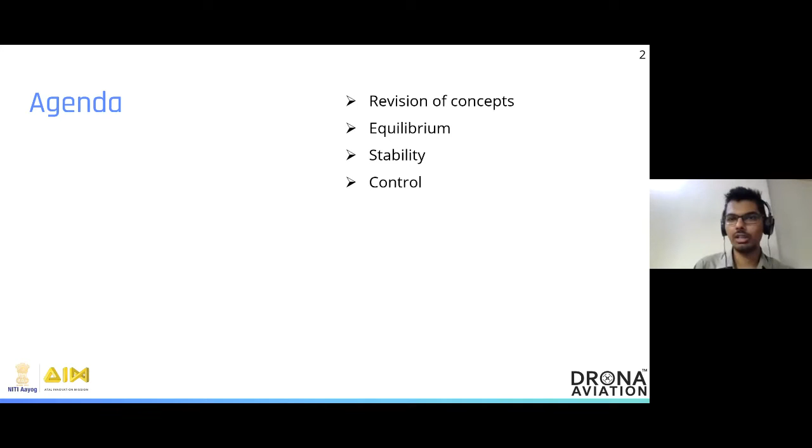So I guess we can simply start with the webinar, and we'll understand what this is. So firstly, let us know what is the agenda for today. First thing is revision of concepts. Then we are going to study equilibrium, stability, and then control. Very simple. Now let us first revise a few of the concepts that we learned previously.

You might be remembering this: forces of flight. So in any flying system, there are many forces that act on it, but we learned about four basic forces, four most important forces, and these are thrust, lift, drag, and gravity. So if you remember, lift is the force that allows a system to go up in the air. Gravity is the weight of the system that will act downwards and bring the system downwards.

Thrust is the force that propels the system in the forward direction, in whatever direction you want to go, and drag is like the resistance. So when a system is moving forward, the air will put resistance to it, and that force is called drag. So we have these four basic forces on any flying system.

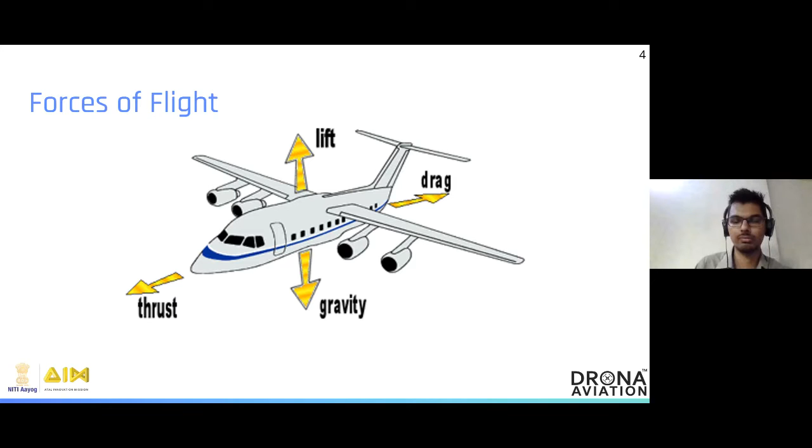Then we learned about the principal axes. In any flying system, we have these three axes. The first one is the longitudinal or the roll axis that runs from the back of the drone to the front of the drone. So this is the roll axis, and this motion is called roll.

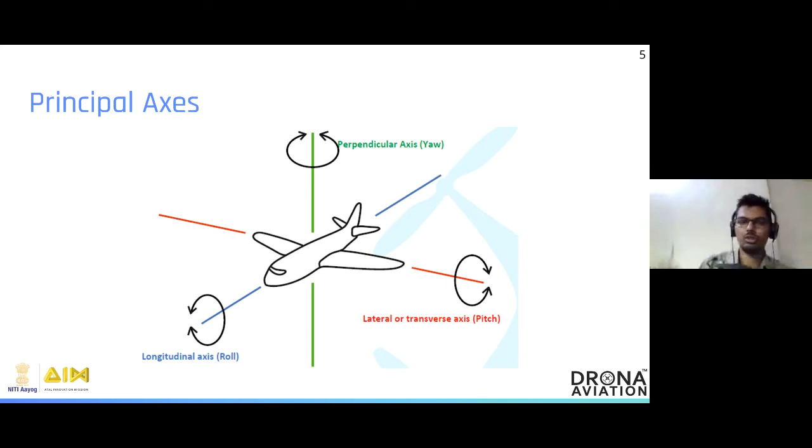Then we have the lateral axis that goes from the left to right of the drone. So left to right of the drone like this, and this motion is called pitch. And then we have the yaw axis that goes from top to bottom of the drone, and this motion would be yaw motion. Okay. So coming to the motion.

Before this, I would like to show you a basic nomenclature for our drone. So if you can see the drone right now, this is the front, and this is the rear of the drone, the back of the drone. I would like you to remember this, because a lot of times I'm going to show these motions, so it will be easier for you to understand with respect to what is the front and what is the rear of the drone. So this is the front of the drone, and this is the rear of the drone.

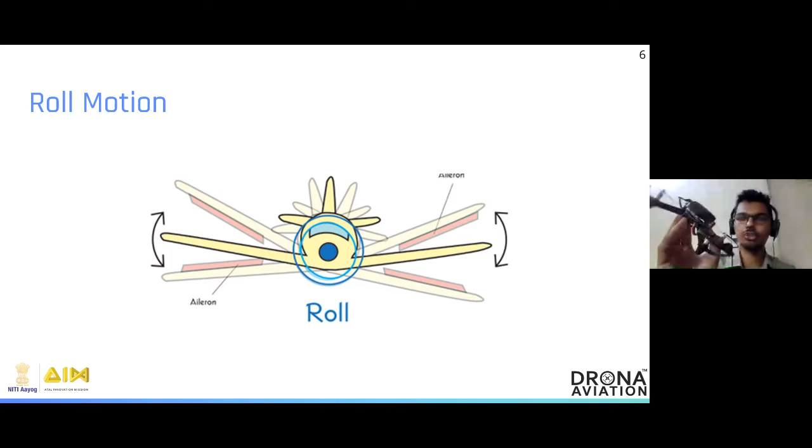Okay. So the roll motion was the first that we learned. Roll motion is the left-right motion of the drone. The next one was pitch motion, which is the front-back motion of the drone. And the third one was yaw motion, which was the 360-degree motion of the drone.

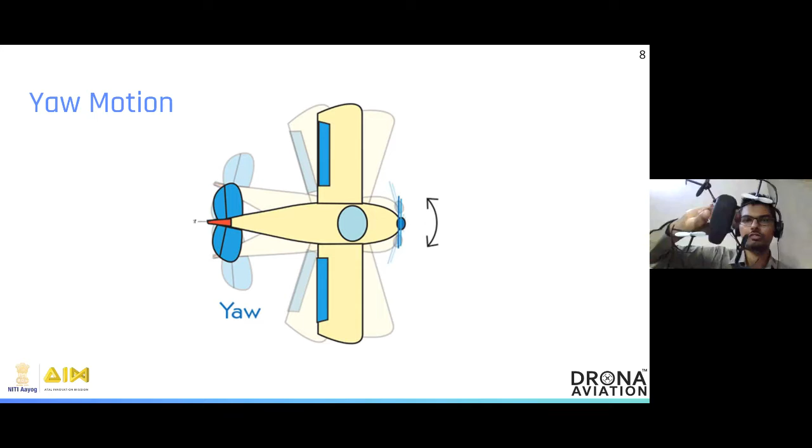So I guess this brings us to the topic for today. The first thing that we are going to learn is equilibrium. Now, you might have learned all this in school, in physics and science. Some of you will learn ahead, or some of you might have learned. It is a very easy topic and a very interesting one. So let us quickly understand what this is.

So the important thing over here is not that there are these many forces. The important thing is there are different forces that act on any body. It might be your computer on the table, it might be anything. So this is the first thing that we learned. Now, what is equilibrium? Equilibrium is a state where all these forces cancel out each other, or the resultant of all these forces is equal to zero.

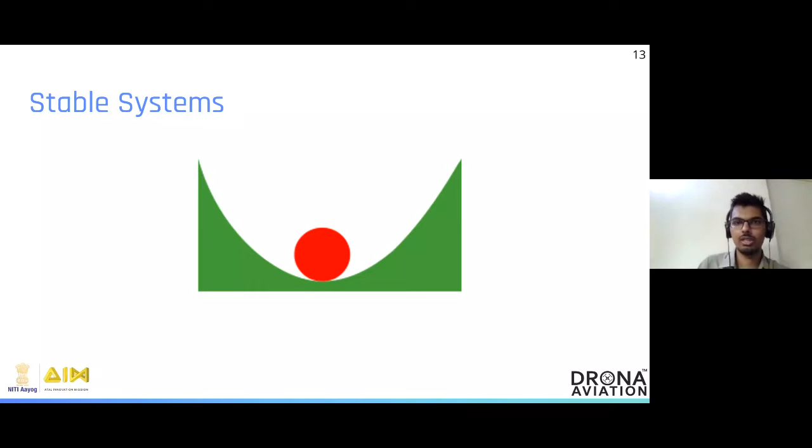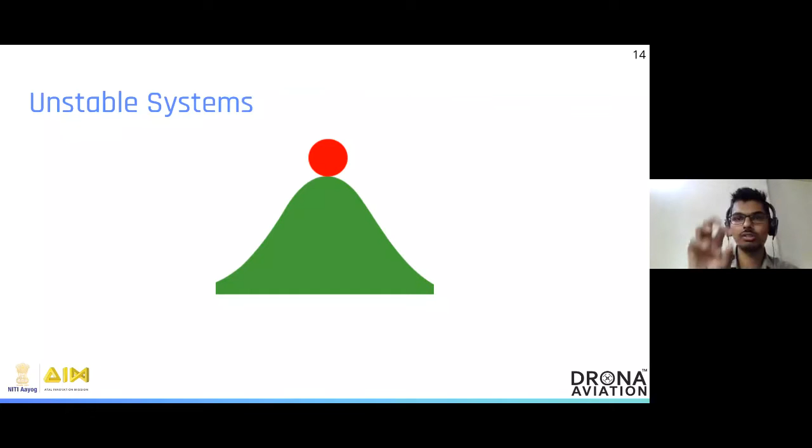So in this system, when you disturb a system, the system will go to another place. The important thing over here is that this system is not going to return to its original place, and it will keep on moving away from its original position. This type of system is called an unstable system because it is not stable, right?

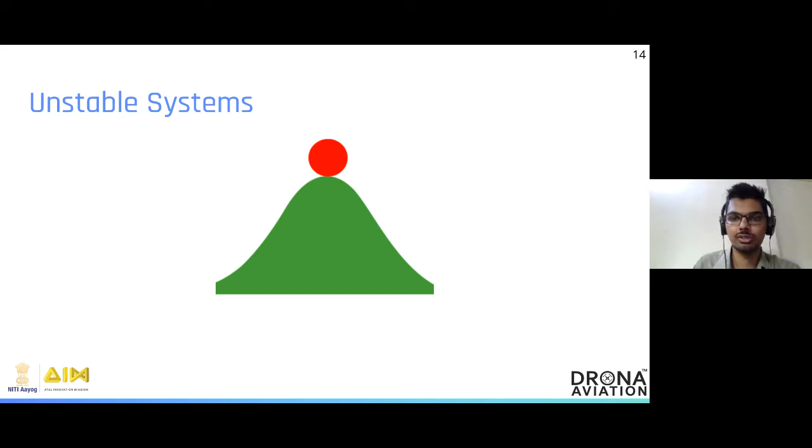But in the neutrally stable system, the ball will move from its original position. It will obviously not come back to its original position. Okay, so if this ball moves to a new position, it will not come back. The ball will move to a new position and it will remain over there.

This is very intuitive. If you have a ball with you, I would like you to do this experiment. Keep it on a table, keep it stable in a state of equilibrium. Just give it a little bit of push. The ball will roll and stay at the other position. The ball will not come back, so it is not a stable system as per our definition. But also the ball will not keep on going in the other direction, so it is not even an unstable system as per our definition. This type of system is called a neutrally stable system.

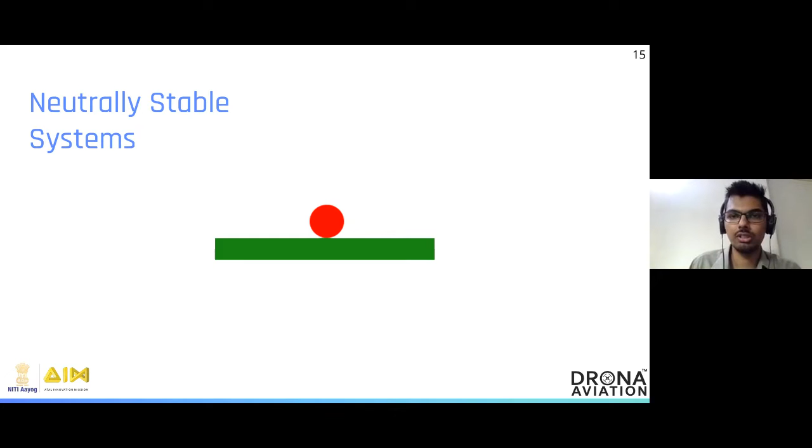If the drone is going to be under free fall, what is free fall? If I just leave the drone, if I release the drone, it is going to fall under gravity. It falls because of gravity. This is called free fall. So what happens is when I release the drone, suppose if I am keeping it at this angle and I release it, the drone will keep on falling at that same angle.

This means that the drone is not going to go back to its original angle, but it will keep on falling, keep on staying in the other stable position that it made. This is the definition of a neutrally stable system, right? So the drone comes under the neutrally stable system with respect to its orientation. All right. So this explains a little portion of stability, that drones are neutrally stable systems. But big deal, what does that mean for us?

When you are going to make a drone, and we saw a lot of questions where students are wanting to make their own drones, it is very important to understand that drones are not stable systems. If you remember, we saw this point in the previous session as well, that drones, the quadcopter basically, are not stable systems. Because they are neutrally stable systems, suppose the drone is flying right now and there is wind coming in from one direction, because of the wind the drone will tilt. Now you do not want your drone to crash because of this, right?

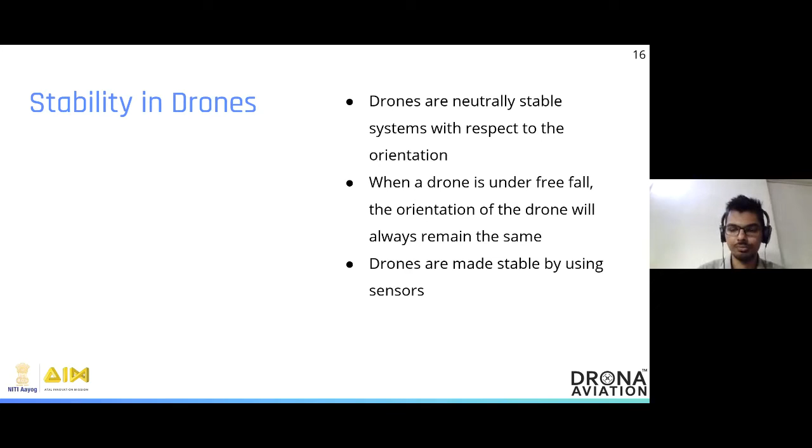Next, we are going to understand a very important, very crucial topic for drones, which is control. How do we exactly control the drone? Now, this is not related to your RC. We are not yet at the level of how we control using an RC. We first need to understand how the drone basically works. How does it move forward? How does it move backwards? How does it yaw? We have no idea till now, right? So first, let us learn how different motions of the drone are controlled.

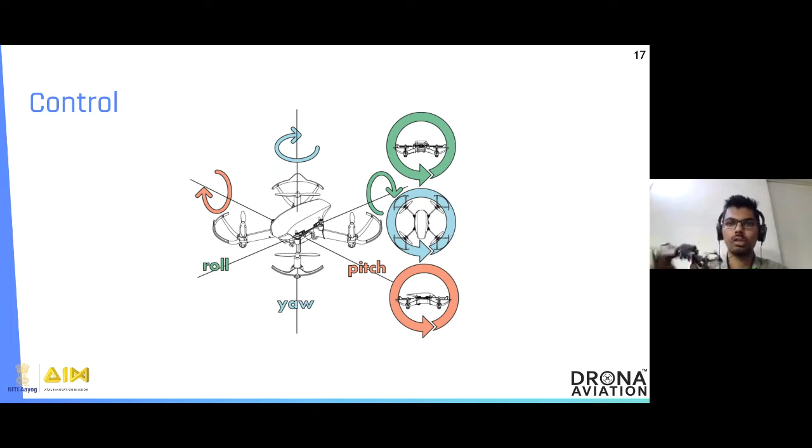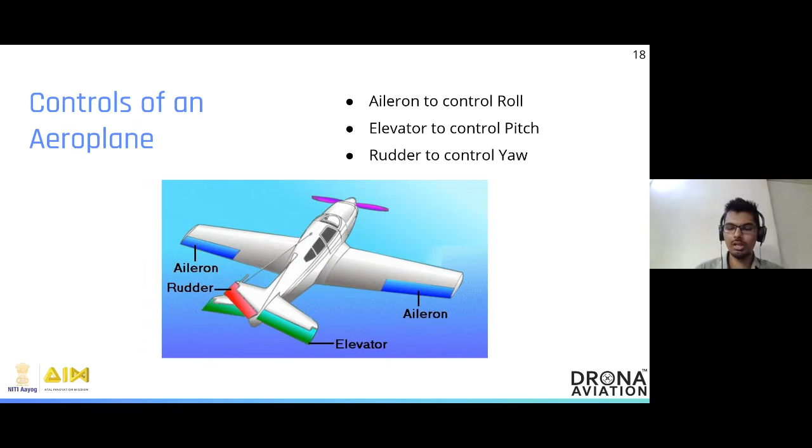Now, if we understand this, I guess the next part is the controls of a quadcopter. Let us understand quickly how a quadcopter works. So before looking at the PPT, first try to look over here. In this drone, we are having four rotors. It is a quadcopter, right? One, two, three, and four. I have used two different colors. I'll tell you why that is in a while. So basically we have these four motors. Okay, how does the drone work? That is what we are trying to understand. How do the motions work?

First thing that we need to understand is whenever a motor is going to spin, the propeller on the motor is also going to spin. When the propeller spins, it is going to generate thrust. When your drone is going upwards, it is going to generate thrust, and using that thrust we are going to go upwards in any direction actually. So when the motor rotates, we essentially are wanting to generate thrust. It is pretty intuitive that if the motor is running faster, more thrust will be generated. If the motor is spinning very slowly, less thrust is generated.

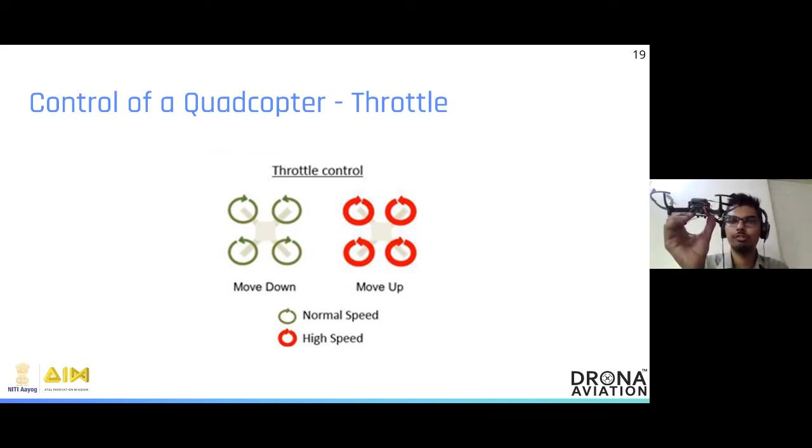Now moving onwards is the pitch control. Now, if you remember, pitch is the going forward and backward. So this is the front of the drone going forward and backward. This motion is pitch. If you remember, last time also we made it pretty clear that pitch is not going front and back. Pitch is simply the tilting.

Okay. So in order to understand this pitch, I would like you to imagine how a helicopter moves. If you have seen a helicopter, I bet you might have played a game like GTA where you have controlled a helicopter. So in that game, if the helicopter wants to go forward, the helicopter will tilt and it will go. If you have not seen it, you can go to YouTube after this and see any video you want. So when a helicopter goes in any direction, it is going to tilt in that direction, right?

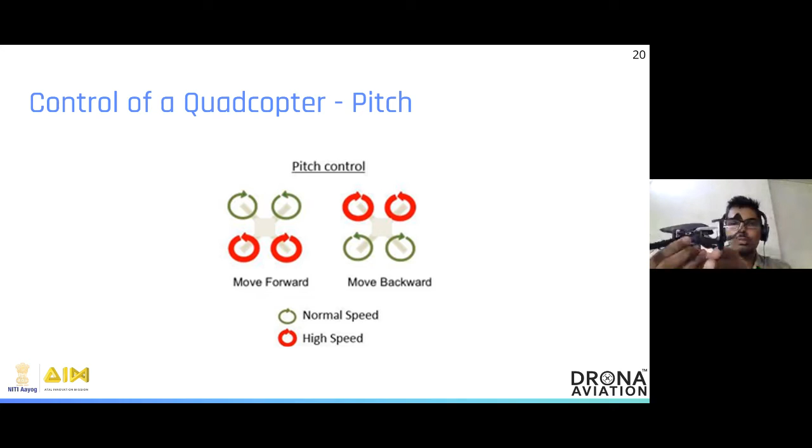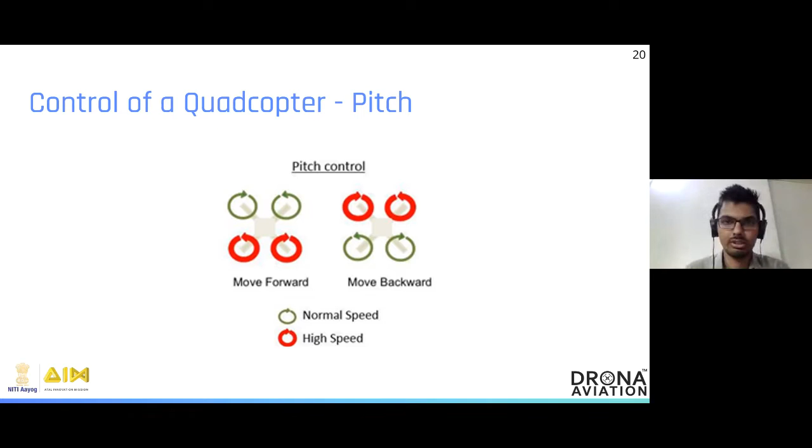Now obviously the drone is not going to just tilt and then we ask the drone, okay, now you have to go forward. That is not going to happen. As soon as the drone starts tilting, the drone will start moving in the forward direction. This is how you control the pitch motion. So if you want to go forward, you have to increase the RPM of the rear motors and the drone will go forward. In the same way, if you want to pitch backwards, increase the RPM of the front motors, and by that you will go in the reverse direction, the backward direction. So I hope this is pretty clear that in order to control the pitch direction, you are going to use the front two motors and the rear two motors, the combination of these.

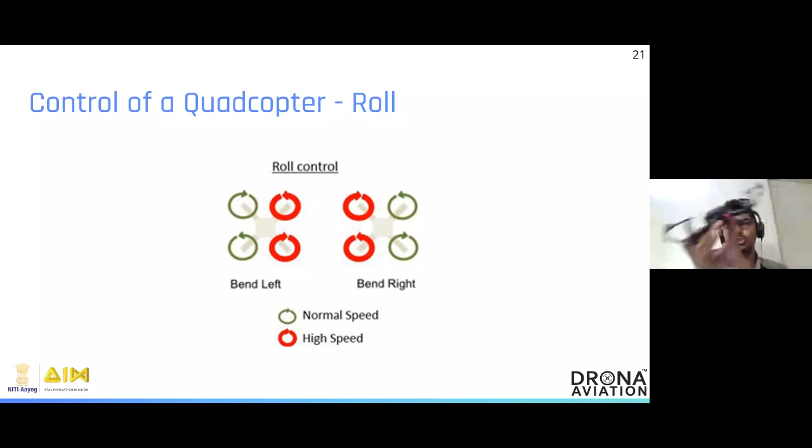This takes us to the next motion, which is roll. Naturally, this is also very easy to understand. Roll is the left-right motion, right? So if you want to roll left, we simply tilt the drone like this. Now in order to tilt the drone like this, you have to increase the RPM of the right two motors. If you increase the RPM of these two motors, the thrust will increase and the drone will tilt. Relatively, you will decrease the RPM of the left two motors. As a result, the drone will tilt in this direction. And as we discussed earlier, the drone will start going in the direction in which it is tilting.

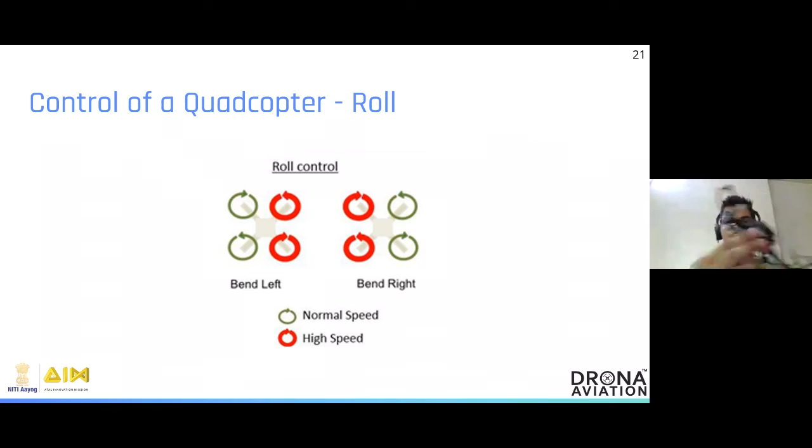So in order to roll left, we increase the RPM of the right two motors, and the drone will roll left. In the same way, if you want to roll right, you are going to increase the RPM of the left two motors and decrease the RPM of the right two motors, and in this way the drone will roll right. Okay, so I hope you are understanding this as well. So just stepping back a bit, pitch is controlled by the two motors at the back and two motors at the front, the combination. Roll is the left right motion, so we are going to control the combination of the left two motors and right two motors.

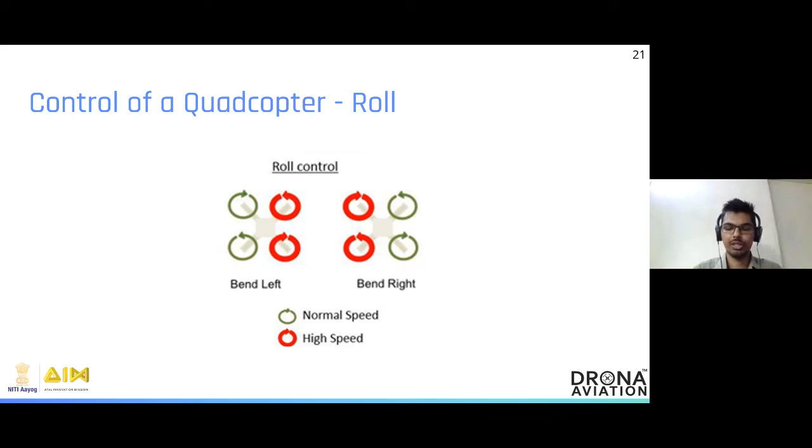I guess this makes it easier to remember. Okay, this brings us to the last motion and the most important and interesting motion, which is yaw motion. Now this is not that straightforward. The yaw motion is this 360-degree motion of the drone. How does this motion occur? How are we going to control this?

So if you are able to imagine, when the drone is going to yaw, there can be two basic directions, clockwise and anti-clockwise. I hope you guys understand clockwise, anti-clockwise. The direction in which your clock runs is called clockwise, and the opposite direction is called anti-clockwise or counterclockwise. So in order to determine that direction, you have to look at the drone from the top. So if I tell you that this is clockwise or anti-clockwise, you have to imagine the drone from the top.

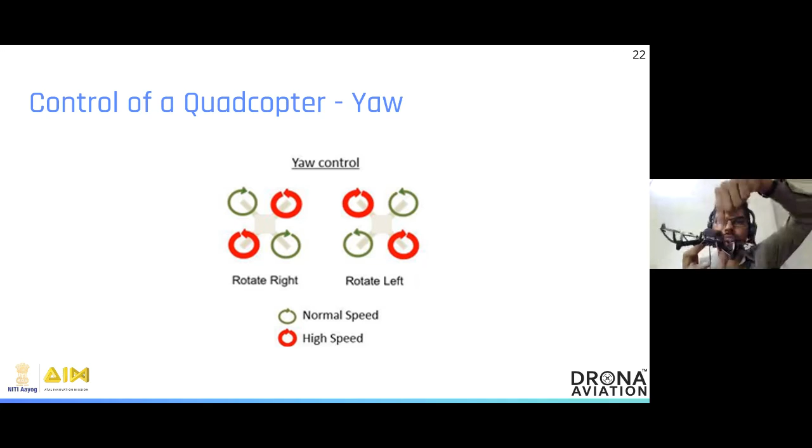So if I am looking at the drone from the top, I can easily understand which one is clockwise or anti-clockwise. So a basic exercise for you guys: if you can see the drone right now, this direction, what will this direction be? This will be clockwise, and this other will be the counterclockwise direction. I hope the camera is not going to mirror the direction, otherwise you will get it totally wrong. But I hope you understand the basic idea. The direction in which a clock runs is going to be the clockwise direction.

Now if we understand clockwise and counterclockwise, we can go ahead. So next time when I say yaw, I will be referring to yaw clockwise and yaw anti-clockwise. So when I want to yaw in clockwise direction, what I have to do is increase the RPM of the two motors which spin in anti-clockwise direction, the opposite ones. Now comes the point where I explain these two different colors.

So in the drone, if you see, I have two white propellers and two black propellers. This white propeller is basically the counterclockwise propeller, so this is going to spin in counterclockwise direction, and the black propeller that you see is basically the clockwise propeller, and it will spin in clockwise direction. So these two diagonally opposite motors and propellers are going to spin in counterclockwise direction, and these two motors, the black propellers, are going to spin in clockwise direction. With me so far? So we understand that there are two different types of propellers used on the drone, clockwise and counterclockwise, based on the direction in which they spin.

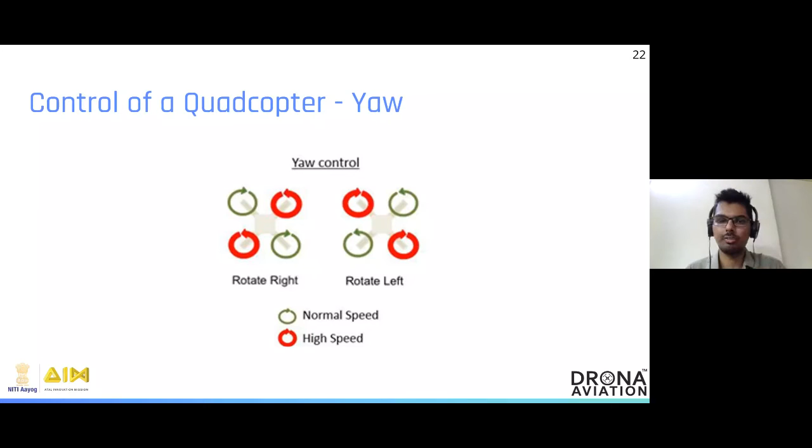So I think this much would be enough knowledge for today. We will be uploading this webinar as well, this session as well. So if you guys have any doubt, you can ask us. You can refer back to this video and you can watch it again.

What happens is the marble or the ball will oscillate and it will come back to its original position: stable system. Then invert the bowl and keep the ball at the top. I guess you won't even have to push it. The ball will immediately go down and it will become your unstable system. And obviously you can keep the ball on a flat surface on a table and try to push it a little bit. You will see that it is a neutrally stable system because it will become stable at a new position. All right, so this is one thing that you can try.

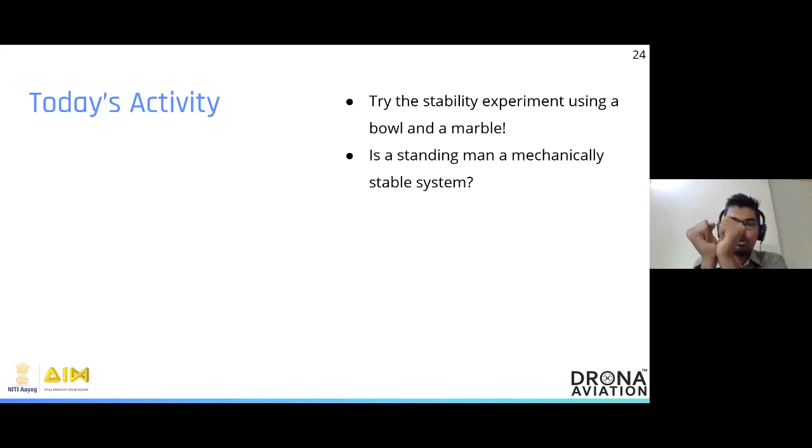And another activity that I want you guys to answer is: is a standing man a mechanically stable system? Okay, a standing man. Now, a few restrictions: the man has both his legs and both his hands tied. Okay, so the man cannot move freely. What happens if I simply push that guy? Is that man a mechanically stable system or an unstable system?

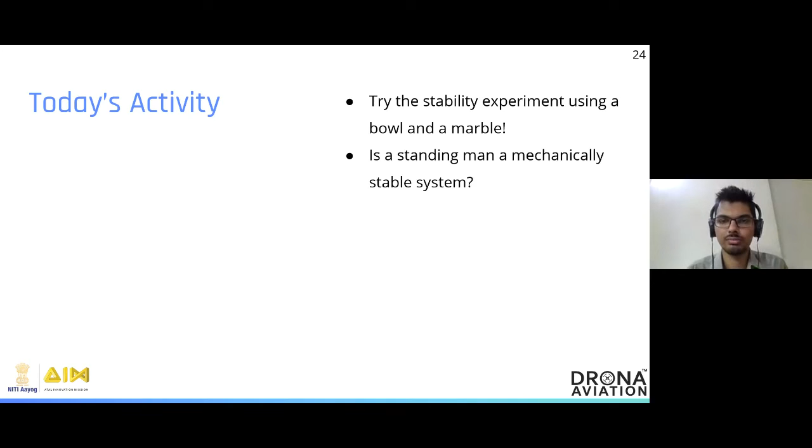I am not going to answer it right away. I want you guys to try it out and let us know what you think about it. And I will answer it in the next session. This brings us to the end of the session for today.